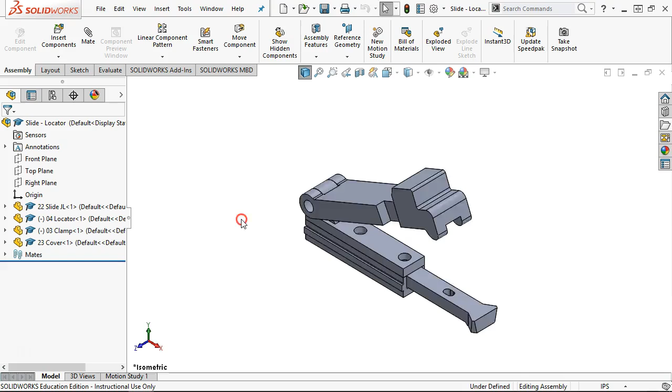All right, so let's take another look at this item. We made the on-the-fly slide locator subassembly, and when I dragged that in, I'm just going to right-click and open it. And when I dragged that into the subassembly, I noticed that it did not retain the slot mate. And all the rest of the mates seem to have come over, so coincident with all of those items did

not have any issues. So I don't know what the issue with that one is, but if that's the only one I lost, cool, I'll take it. Yeah, I'll count that as a win and go on. So we want to reapply the slot mate because it's still going to move within these dimensions. And I think we resolved the dimensions.

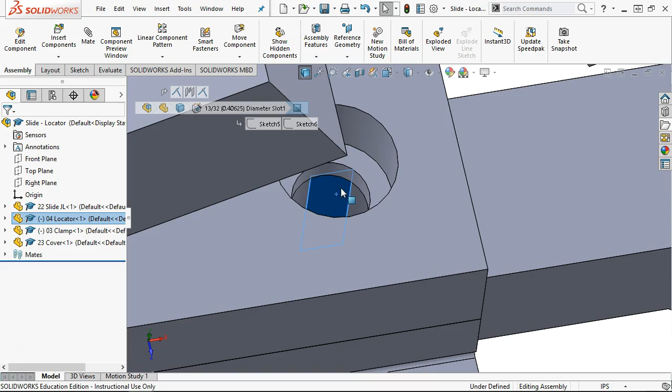It's another one of those. I sat and stared at it for a few minutes and got a slightly better view of what I suspect the rod is going to locate on. Basically, they're using the connecting rod without the lower half of the bearing in place. So that part of it sort of makes sense, that this is contacting the inside of the connecting rod without the lower half. So to apply this, I need some portion of the slot, some portion of the hole,

and we go into the mate. Is it going to jump right to it? Probably not. Tangency, maybe. Can't get to tangency. There's a gap tolerance there. There's not anything for it to pick up. So we're going to go over to mechanical. And then when I identify the slot, it's on the face, not the edge.

And when I'm picking for any mates, just as a general statement of managing mates: faces and planes. So face to face, plane to plane. Those are going to be my first choice. Maybe not always my most convenient, but my most stable. I'm always confident that I can get a plane to plane to work, or I can get a face to face to work. Then secondary is edges, and last is points.

So in previous videos where we've started the assembly, doing two cubes at a point, they orbit each other really nicely, but other than that single point of reference, it is very confusing. We looked at the constraints, and this is going to be another one where I'm going to have to open up the help file and say, okay, what does free do? Center in slot, distance along, or percentage along.

So I kind of suspect that if we're some kind of cam or some kind of movement, we could set the distance along or the percentage along to restrain the movement within that slot, because some other actuation is starting or stopping that movement. We're just using the clearance rather than going the full distance of the slot. So I'm always going to try free first, and if it cooperates, then I'm just going to stay with it. It moves from center to center, and that's pretty much all I needed to do.

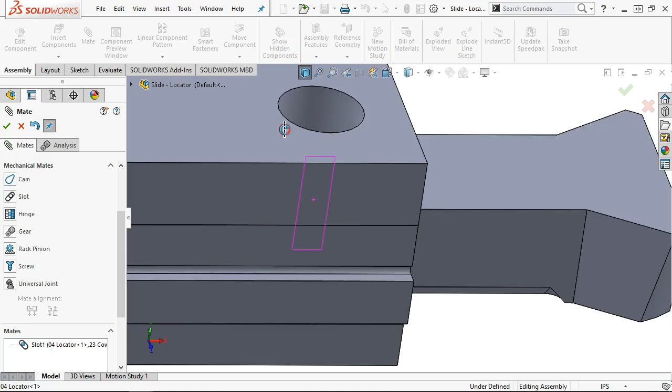There may be another 10 or 15 thousandths of tolerance there, and I say that, and then I'm not sure if that's the case or not. So let's go to, and so my line, no, it's going to contact. So it's not even going to center line, it's going to contact. All right, I'm good with that. That's representing the movement. That is what I kind of expected it to do. I can hit that wall, and I can hit that wall, and I'm done.

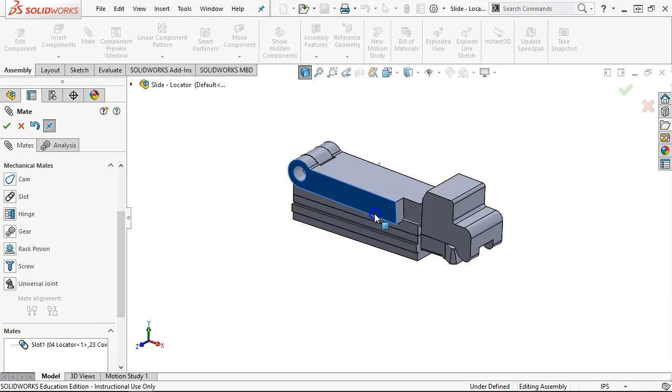And the spring that goes back here is the one that's providing the pressure, and then that rough locator is probably the next thing that we're going to bring in. Notice too that wherever I position that whole, two objects occupying the same space, it's on me. I have to make that determination. So this would be a good place for an angle mate. I know it can only come up so far, and I'm going to take my best guess and say 30 degrees. So while I'm in the mates, we've already applied, I hope.

Yeah, it looks like it. So a standard mate and an angle would say, set this at 30 degrees and you're done. 30 degrees, locked in, no movement. If we want this to be dynamic, we have to go to the advanced mates. And in the advanced mates there's a limit angle, and it's not specifically called a limit angle, it's just the advanced mates angle. And you get 3 selections.

All right, well, I didn't select anything, so my optional direction reference: plane, face, linear edge, or reference. Well, let's go with that one and that one. And it better not have separated from these, it's just the rotation. So the first angle is that it is at 30 degrees. That's its current location.

The second maximum value, 30 degrees. That's its current location. If I set that maximum value to 60, fine, no problem. It's going to stay at 30 degrees, but it can move up here, and then it can only come down to 30 degrees because that's my minimum value. My minimum value goes to 0, and as long as my current position is between the maximum and the minimum, I don't have any issues.

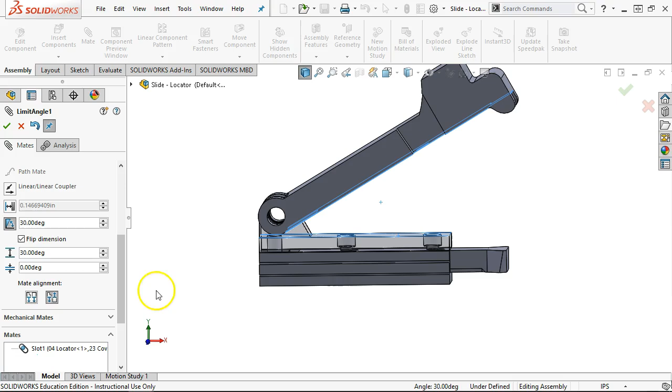So let's see what the result is of setting that. And I have my 2, so that one goes from 0, 30 degrees, 0, 30 degrees, open, close. Notice that I'm in the closed position.

We save that. Let's go ahead and rebuild and save. And I come back to my top level assembly. It updates, and I go to open, close. Well, it moves back and forth because I haven't figured out where all that stuff goes yet.

But I can't open and close the clamp just yet, or the cover and whatnot, because it's been set at a rigid, as a rigid subassembly. So we look down through here, and I look for rigid, and I look for movable, and it would be nice, but I don't see it.

So we come up to, sure, it's not going to be under component. Those are just view. Nope, don't want to do that. So for whatever reason, it's been in component properties forever, and it will probably continue to be in component properties forever. At the bottom right of component properties, we have solve as rigid, solve as flexible.

As soon as I say flexible, well, I'm going to get the funky dance because everything can move, but I get the ability to turn. And then I find my 30 degrees. I was a little optimistic, unless it's out here. And we're not going to make it out there, more likely.

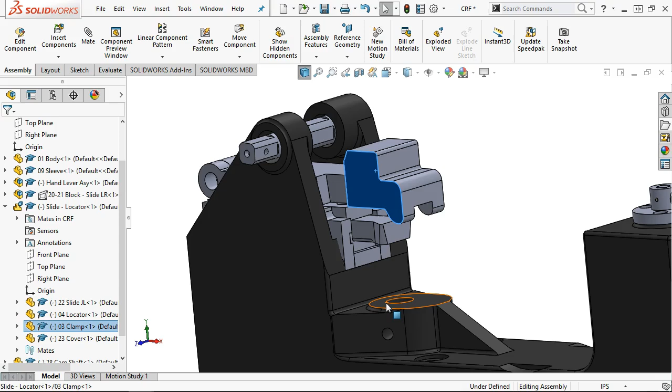Run that by me again, because solve flexible and rigid is going to mean something different to me. Okay, so at this point, I made this flexible so it moves in the top level assembly. Right, see, I would call that motion between rigid bodies. That's fine. Oh, so let's call that flexible.

And then rigid is just basically calling it I have one configuration, not even configurations, the last place that I left it in the subassembly, wherever that may be. That's where it's going to consider it being fixed. Right, so rigid. Okay, and now I go back to try and move it.

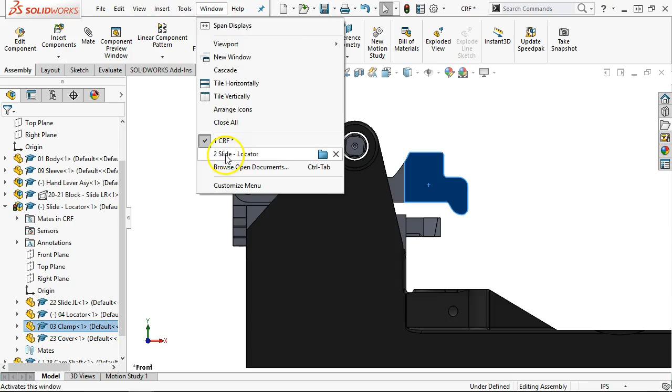Well, it can move side to side because that's the entire subassembly, since I haven't added a mate to tie it together. So to return to the subassembly, and then I open that up a little bit. I save it, rebuild, do all that, come back in. Yes, go ahead and rebuild.

Now it's in that position because that's where I left the subassembly. So it's rigid based on the last known location in the subassembly. I go to move this, it's not going to move.

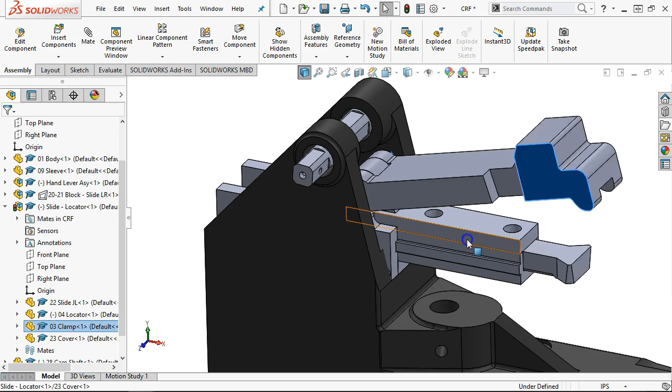And interferences? Yeah, I have interferences. If I want to look at those, this is as good a time as any to ask you to turn something on that shows or prevents that. The rigid flexible is one option, and then once I determine the max and min of this locator drive, or how much I can drop this face to get more clearance, then make a pilot assembly. That's one of the things we're first concerned about, interferences, among other things later.

0.25. All right, so I still have to resolve that one. I think I was being a little dyslexic on my numbers there, so we'll go back and pick those up and make that change.

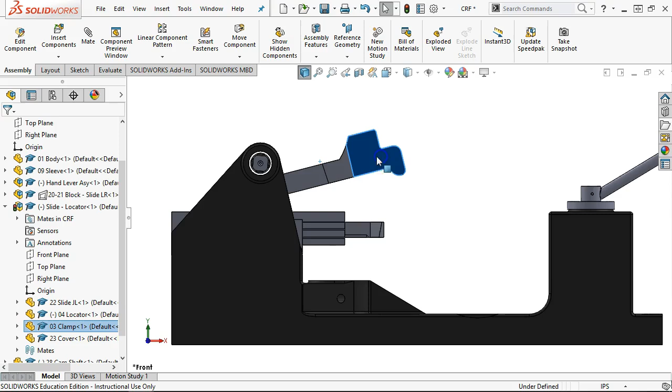Looking for the interference, if I go to Move Component, in Move Component you have collision detection. If I just go to All Components, it's already going to start in collision because we have this thing going on where I missed the dimension or have to check it. So these components, I want to see where this hits this. And when I resume drag, it's already in collision.

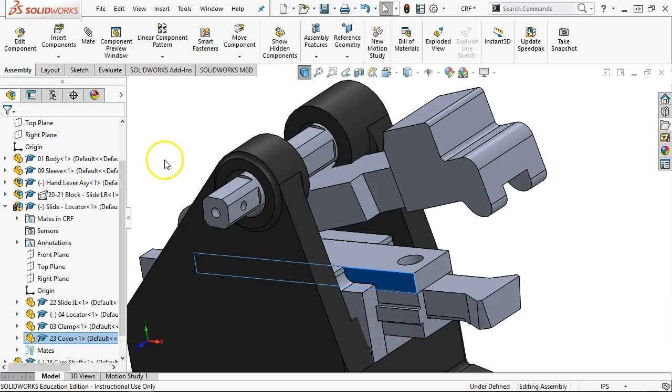So come back, it shows me where it hits, and it makes a little thunk, thunk, thunk. I don't know if you can hear that on the speaker. That's kind of handy to be able to see where that collision is occurring and make it resolve.

No, I did miss it. It was 22510, 22515. So I missed the 2, that's where it came out at. And save.

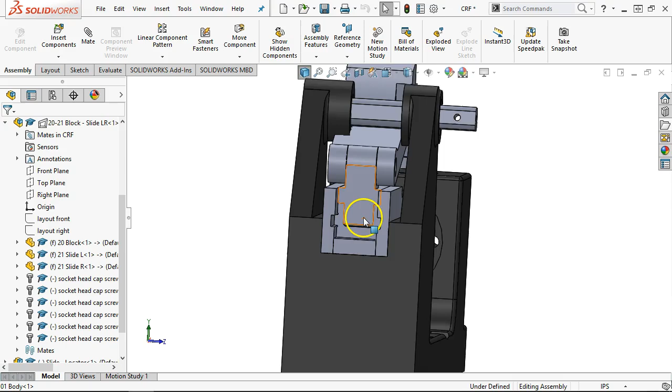All right, so again you see an obvious error. I got to go back and check that, find out what's going on. And now that looks a little tall because I was thinking this really needs to be flush. So somewhere else in the layout of this item, I have to go check that dimension, or I picked the wrong thing out of the sketch.

All right, so you get into these levels of complexity. I'm not going to chase every dimension to the nth detail. I've got to move this along and figure it out as we get into the assemblies.

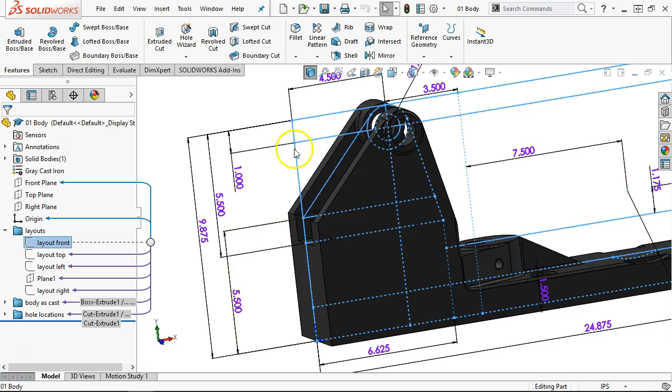All right, so we'll take one more quick look at this before we get into it. There were the layouts, there was the front layout, and this went 5.5 from the top, and that 5.5 is in the wrong position. It looks like it's going to the very top edge when it should have been the center, but that's really only good for 1 inch, though that might be the difference.

All right, let's go back into the front layout. I'll pick up that sketch. I'm trying to get a little better at dragging these dimensions, so if I reposition to the center, wow, there's the 4.5, so it was good for 1 inch.

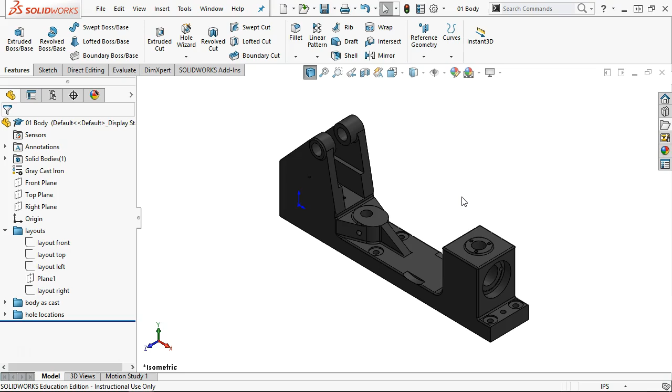It updates, that's a little closer to that face. A little weirder on the fillets, so my weird fillets just got a little weirder. But now at least I've identified another potential error, and I've taken a potential error and validated it, and said okay, this is what I need to update to.

So that looks better, that comes up flush. All of a sudden my 30 degrees is not so much of an issue. I still don't know whether this is in backwards or forwards, we'll get that figured out eventually, hopefully. As far as clearances or what it would be doing back here, it doesn't look like anything's going to be in contact. Even if this could come all the way up, it's not going to rotate around.

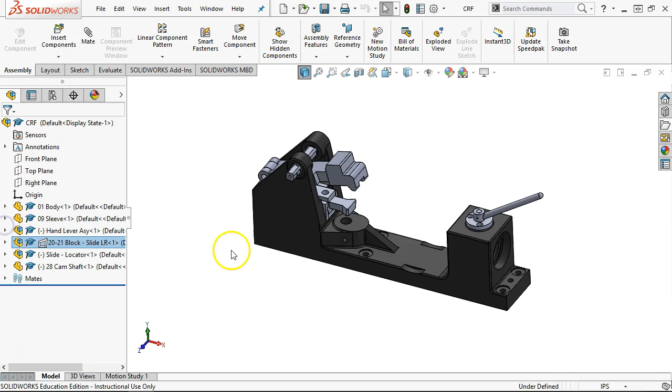All right, and then we'll rebuild and go ahead and save. So a couple things crossed off the list. Let's go ahead, we're still working on this side, so I haven't created the bushings, and there's going to be a bunch of little hardware. I do want to get into the drawings tonight a little bit, so we can carry those over.

And so let's bring in the locator and the major components, and then we'll take one more pass after, probably Thursday night, sorry, after spring break, Tuesday after spring break, and get into the drawings and start talking about manufacturing processes and design for manufacturing.

So, insert component existing, or thereabouts. We had that rough locator, and it goes into position. I would really, that one's not going to be the best example, but we'll go ahead with it. So that goes into position, and it is going to be concentric, so it threw it out there in space somewhere, not too far for once.

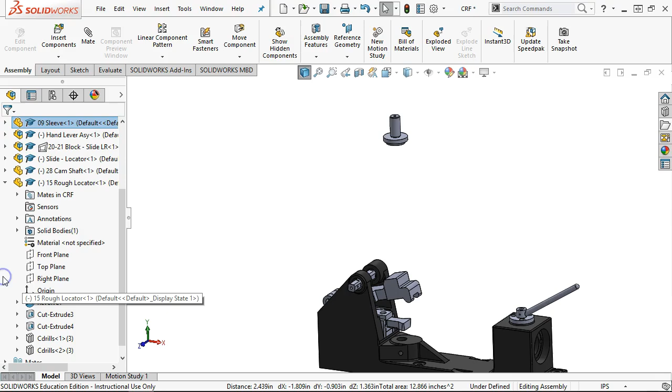I did not catch the orientation, so this is one I'd like to reverse, but I don't want to go too deep into it. I right-click, expand out, right-click on it, and flip the alignment. Of course, then it throws it to the other side of the part, which is always fun. Why couldn't it just leave it there? But it's in the correct orientation now, so we're good on that end.

This is going to be in contact - edge, no, face, yes, coincident. And then we have to figure out rotation. As I come around, I should see that little fingernail, but the fingernail doesn't help me a lot.

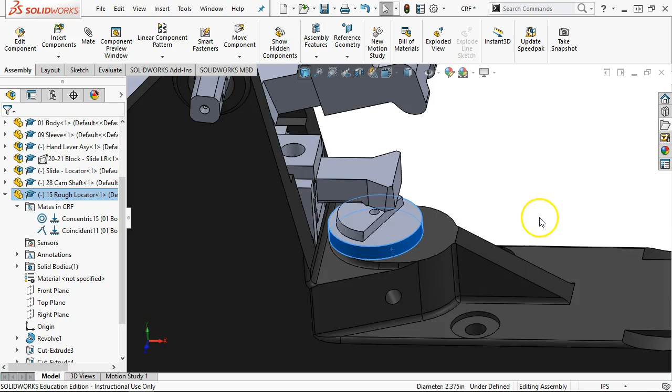We're still waiting until I have the connecting rod in here to see, height-wise, the rough locator, how that's going to actually turn - kind of what the intent is. I know it's going to be somewhere along that line, and then we have one of the plungers or something in there holding it in place.

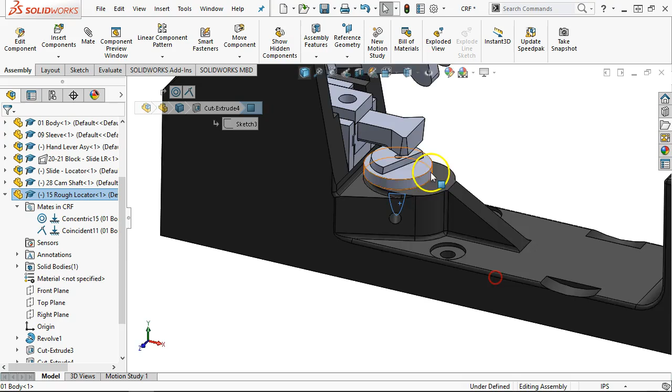So the question is, do I leave it so it can rotate and come back to it, or do I try to put it in position? I don't really have anything on that face I can use. So really I'll probably end up back over here, and just for convenience to the front plane, we'll go ahead and set it at an angle.

60 degrees - let's see if that keeps it pretty close to the fingernail. Maybe off a little bit, depends on how far we rotate. But again, I pick those mates on convenience, not necessarily that I have a complete mechanical understanding of the function of this part.

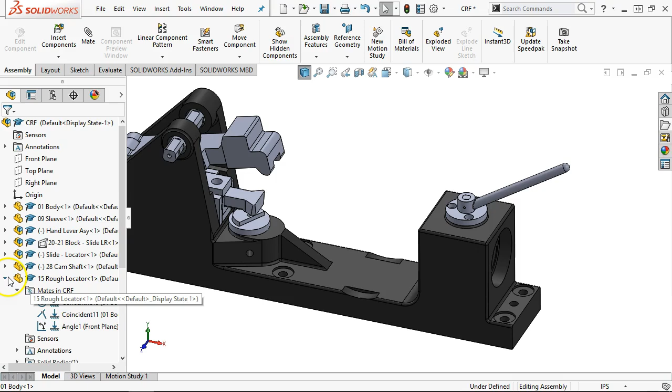All right, so we've got that. Last time, at the very end - I don't think that made it to the video - we went out to McMaster.com and grabbed a couple of bearings. So, insert components, and we drag down - there's my 5972K510 McMaster part number ball bearing. We got a sealed bearing, and as usual it comes in with a couple of sketches shown, so we just hide those sketches and that sketch, and we're in good shape.

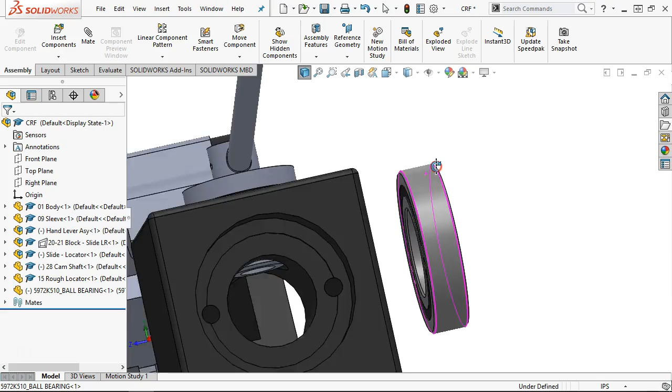It doesn't have much, I guess it has a little bit of the raised area, but really this relief on the interior is so the floating part of the bearing isn't contacting the surface. I want contact to contact to be coincident, and I'm showing the workflow that puts you into the fastest assembly process. Going into coincident, then control-select the cylinders, so cylinder to cylinder goes concentric.

So this would be one of my hardware pieces that I need, but I don't necessarily want it in this order. So one of the things when we create the bill of materials is the fasteners, the pins, the individual items - those may end up in a folder at the bottom because they're not in any specific order, in a folder that says, this is all of my hardware items.

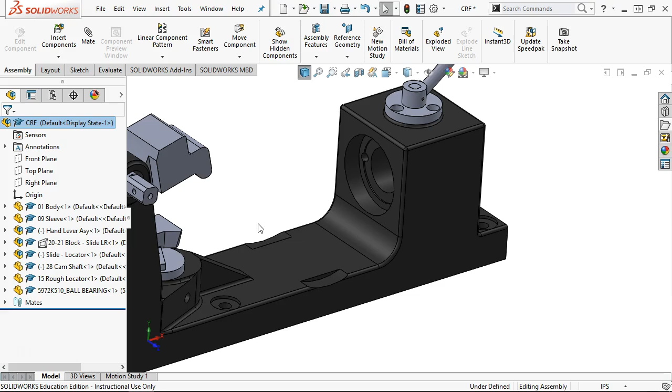Let's see, when we did the assemblies, I don't think I've gotten to this one yet - we went through the 5 ways, 6 ways. Okay, now 6 ways. If I hold down the control button, I can bring in another instance by selecting from the feature tree or from the model. So if I control-select this and just drag it, it would create a second instance of that part - so it's not a new part, it's an additional instance.

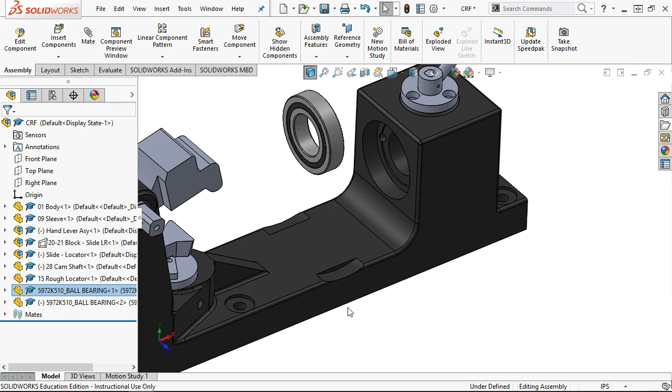And so instance 1 and instance 2 are the little brackets. Everything else is instance 1. We are incrementing those values, so if I deleted instance 2 and I brought in instance 3, it's not going to go back to instance 2. All right, and those numbers are pretty much irrelevant other than I'm kind of keeping track of how many instances over the life of this assembly I've managed to generate.

All right, so face and control select the face, coincident, concentric, and we'll lock the rotation. I want to say inside of when we're doing the paperclip, those pop-ups are going to be quite a bit faster than going into the mate list and picking those. But I believe when we assign concentric, it comes up with an additional lock rotation, and you can do it right from the mate. But expanding it out, identifying the concentric and saying lock rotation, not a bad thing.

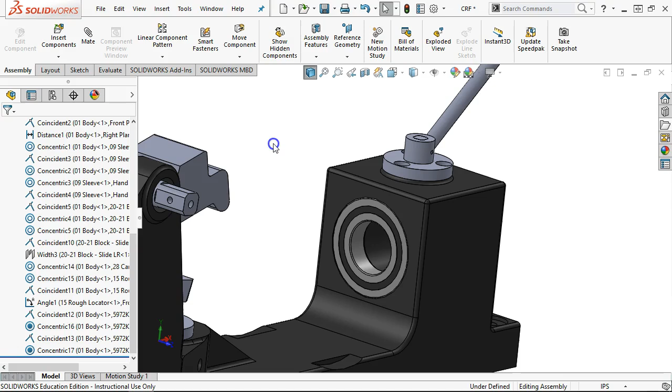The other thing is within the mates, what I've done for fasteners is there's usually kind of an apparent break here where I know I've started to add fasteners, socket cap screws, hex bolts, things along that line. They're pretty apparent that I don't care about the rotation, so being able to go through and identify all of the concentrics, and this is a bad example of selection, but I can right-click on all of that group and say lock the rotation for all of my fasteners, for all of my bushings, or all of my whatevers. All right, so other than that, I don't go into the mates too much anymore.

All right, so we got that far. We're ready for the cradle. And we said that the cradle would be a good candidate to generate a subassembly, not come into the top-level assembly and say after the fact, hey, it'd be great if this was a subassembly, let's create one on the fly. So let's build a subassembly for the cradle. And I still have not created an assembly template that is residing in my folder, so I'm just jumping back to the standard templates or tutorials and dealing with that one. The open documents are the top-level assembly, so not a good selection. We will browse over to find the cradle.

And then, let's see, we never did find in the database where we could put the threads on, and so we'll probably come back to this one after spring break and start with the swept cuts, and I'll see if I can find out the information on the thread tool.

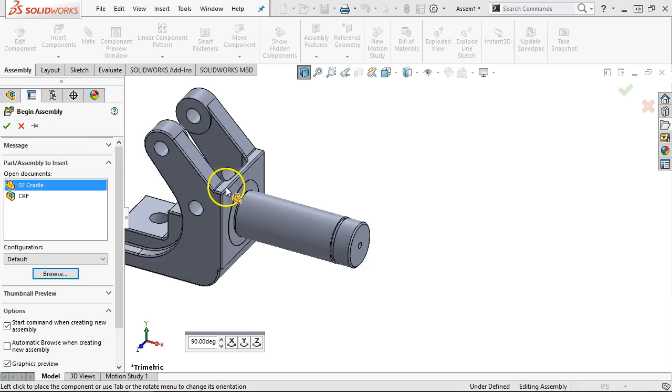So again, going to the OK puts origin of the part to the origin of this assembly, and it fixes it. Well, all of the rotation is going to take place in the upper level assembly. Don't care about it here. So we're just going to go ahead with leaving that fixed in position, and the rest of the items tie into it.

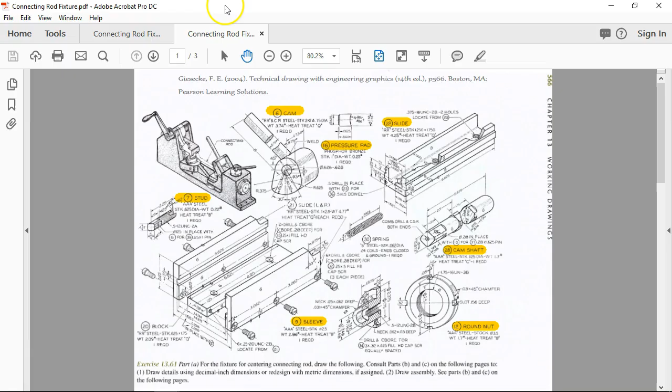All right, so the other item 6, cam. And let's fly this in for a second. We'll take a look at some of the build. So the cam goes in, and then the connecting rod top. And we can't really see what's going on there, but there are the 2 lock rings, retaining rings. And so item 6 that we had some fun with is going to be in that group. So I'll go ahead and bring that one in. There should be an additional shaft.

Oh, before I fly that one out, let's go to the earlier and see if we can decipher. So there's the cam. And then it comes back, we have the spring, there's that other little block with the angle, so we're good with that. I can't really tell which one that is. A little bit cleaner on the side. Alright, but no specific call out other than, hey, go find that part that kind of looks like that. And so that's the other rough locator. Alright, so something else to look for. We'll find it eventually. Alright, so the spring, and then the item 6, and the other one.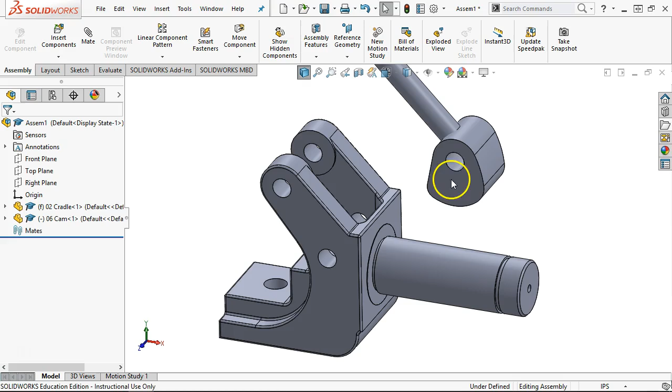So component. And a lot of this, what you're seeing is habit of going to insert, insert component. And so we bring in the cam. And we already have it in position, so that one can go concentric. And we know we have that kind of tight fit, or maybe interference fit at this stage. So I probably wouldn't go coincident because I'm going to have that gap. I could show it as coincident, but probably not my preference.

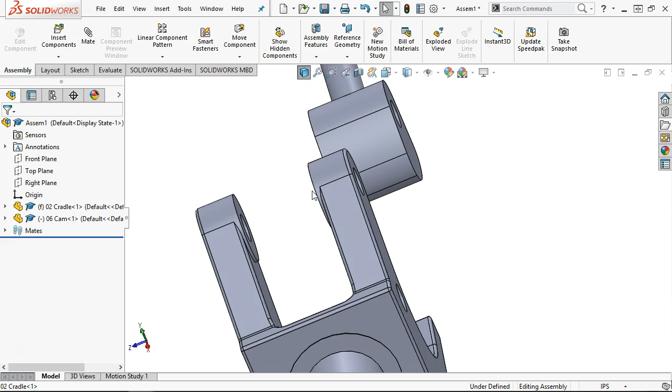I would rather stay with the width so that when we're looking at the gap tolerances or trying to measure gap tolerances, because we stayed at maximum material condition, I'm already in the tolerance analysis. I'm already at minimal gap tolerances, and then I can relatively easily go back and calculate maximum gaps.

Alright, so mate reference, we will go from standard mates to advanced, pick up the width. I could put this on the front plane, so since we drew these as mid-plane extrusions, I could go to the front plane. I kind of want to bring out the width a couple more times, so between that face, and then it self-centers. And if we go to the top view, then I can see there's a little bit of gap.

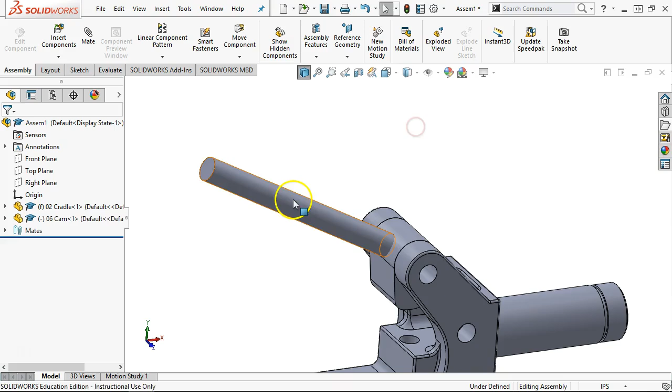So what happens is if I come back to simulate this item and put some loads on it, depending on the selections that I make for my simulation, those gap tolerances and the shaft and everything else, that stack up, comes down to some very specific settings in the simulation that we're defining.

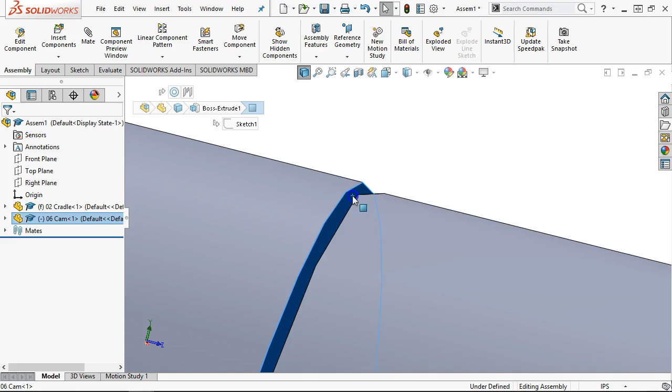Question? What's the width of the cam? This was one of those weird 1.734 that worked out to 1.764 or whatever. So yeah, that's a strange one. So it ends up that there's only, back to that half thousandths thing, a couple of thousandths clearance. Okay, 10 thousandths of clearance. But in my assembly, since I haven't set any dimensions, that could be 5 thousandths or it could be 12 thousandths. I don't have 3 decimal places established.

All right, one of the last parts that we did. Let's go ahead and save this. And we're just going to call that the cradle subassembly, since it doesn't have a number or anything associated with it. And we'll browse. I can't remember what that thing was called, so we'll have to find it. And there's the other shaft, the other cam. Nope, that one's buried. The rest button. Hey, that's probably it. That's what goes in there. Found it. And then our 2 round nuts, the clamp. That's what I'm looking for.

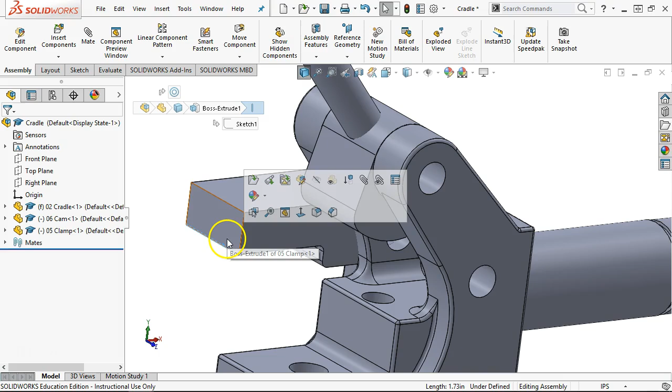Alright, so we'll go concentric. And then for comparison, we expect that to be 1.734. For comparison, let's do this one as a front plane. So I extruded this mid plane, and I should be able to go to the front plane of the assembly. I hesitate to go to the front plane of the cradle because I would like to have some error checking in that if the cradle was to move off of center, that it would, wow, there's an interference there all of a sudden. What happened? And we can trace back through our strategy and follow that decision process.

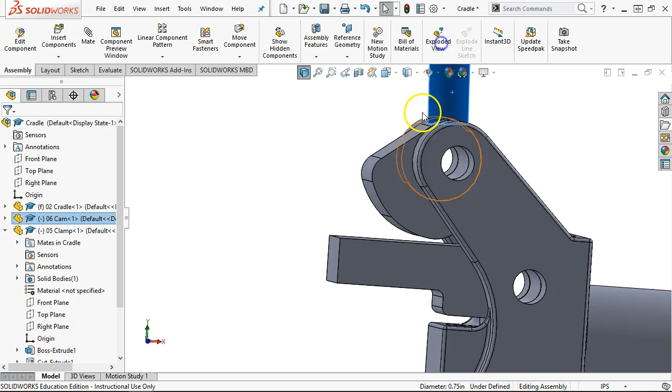So that can go to coincident. Maybe front plane of the part, front plane of the assembly, and that will also center it. But I have to make some of those decisions and otherwise know that they exist. Alright, so another advanced mate. And since this is not a complete surface, I'm going to be limited in what I can do for the cam, but we will see how far it goes. I should only need that surface.

So, cam follower. Alright, so I'm not just going to jump into the cam follower and throw that one at you. We will go into the mates, and under the mechanical mates, we are going to be able to pick up the cam, and we'll take a look at a little bit more in the selections. Alright, the cam path, and then the follower. So it's pointing at the follower. And so in purple, the face, and then the cam path, yeah, that's the arc. So it's pretty much what I wanted. I thought there was some more that made me think of something else.

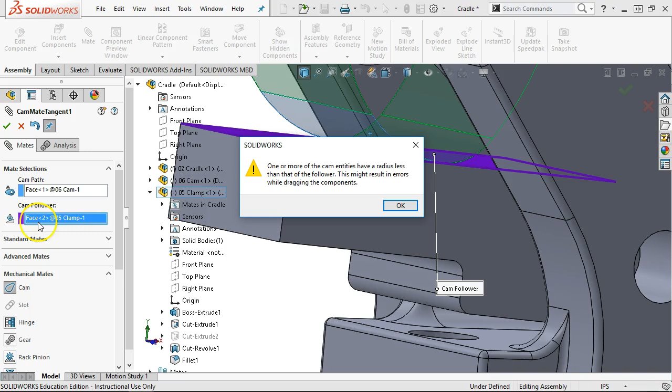So let's go ahead and have a radius less than that of the follower. Oh, it's not going to accept the flat. It wants that little bit of arc. This might have an issue, so let's see if it has an issue. Well, it follows it, and then it kind of reverses and does some weird things. So maybe I need a limit angle that I'm only going to throw this 30 degrees. I could do that, and then I'm not going to run into the weird interferences, but I have most of it there. I get the general sense of what it's supposed to be doing, so not that big of a deal.

What's the other shaft that goes in there? Or was that just a pin? I think those were just pins. Let's see if I can find that one real quick.

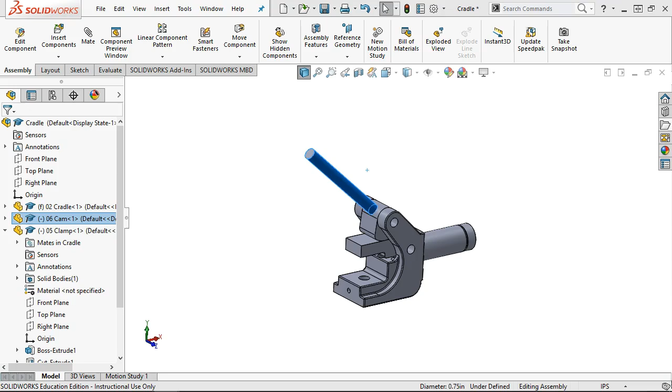Yeah, 625 by 3.5 inch pin. Alright, we'll worry about those later when we get to the bushing bearing side. Alright, so cam, the clamp, insert components. We'll browse back over to the, whatever I said that thing was, the rest button. And maybe the rest button, let me go ahead and kick that one out and make sure to save this, rebuild and save.

And I don't want to let this go too long before we do the mate references. So I'm going to pick an edge, and then the rest button is kind of a candidate of maybe we use this more than just in this assembly. And so if I add a mate reference and I'm going to put this in multiple locations within my assembly, having the mate reference is an advantage because we're going to pick that edge, and then I'll go ahead and save it, and it adds a reference, default reference.

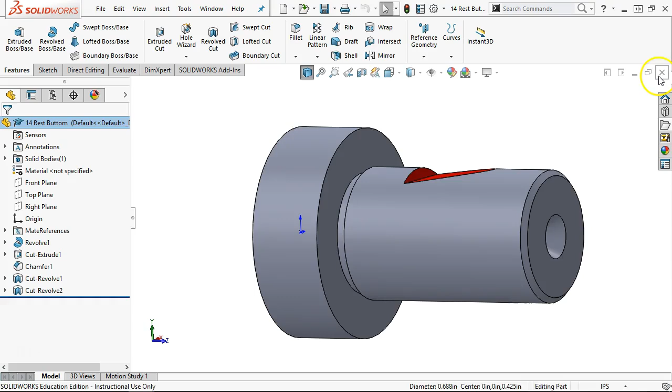And there's some rules of naming if you want to have more than one mate reference, and then it gets confusing, and about that time I just kind of go, okay, I can use one mate reference, cool, next. And so I never quite make it to the second and third mate references. I'm going to get a lot of value out of just this one, so I don't worry about the others. So if anybody figures it out, let me know.

Alright, so rest button comes in, and now, instead of floating around in space, it says, oh, you have a cylinder. That cylinder is automatically going to get a concentric. Those faces are automatically going to get a coincident. And so I click, and I'm done. Alright, so that one little mate reference saved me a couple steps.

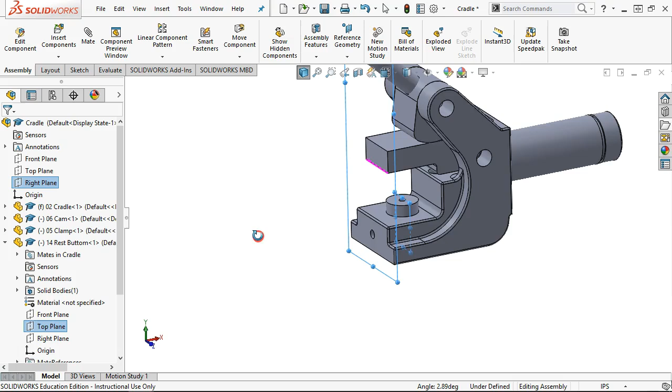Alright, so let's see if the length came out okay. And so this one, as far as the rotation, oh yeah, we were going to determine if that could have the angle so that we could improve the manufacturing process rather than having that back angle and custom grinded tool. Okay. So that being the case, let's see where that lands. Front plane, top plane works. And then the right plane of the assembly, I'm good with that. I'll just jump into the mate, apply a parallel.

All right, it used to be that the default was coincident, but the problem with coincident is there's a 1.5 inch gap there. So coincident hardly ever worked unless they were already aligned. And so 2014, 2015, somewhere in there, they said, okay, if you have two planes that aren't already coincident, it's going to default back to parallel and not bark at you every time you do that. So that was kind of nice. All right, so hopefully that's the rest button and where it belongs.

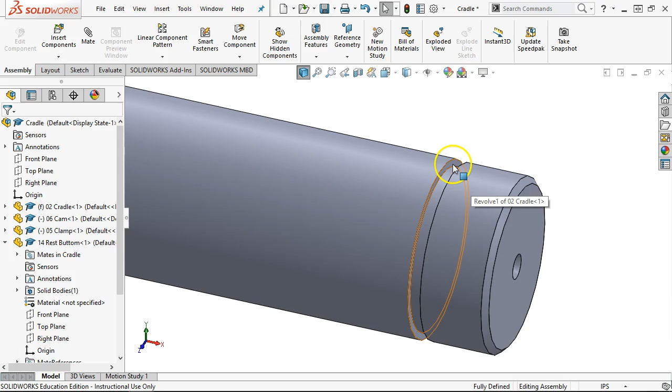So then the question on the lock rings, when we put those in position, I don't want to create an interference by going right to that edge and saying that's my edge. So we're going to do one more save and come back to the upper level assembly. And really they're going to be sitting between face to face. So at least in the semi-perfect world of my model, that's going to give me a normal distance of 4.25. If it works out that in the cradle, that distance ends up being 4.25, 4.17, or that distance ends up being 4.25, 4.3. All right, I'm going to be setting a distance mate for that item.

All right, so let's go ahead and bring in the rings. And we have the round nut, and then we have the one that has the bearing face on it. So I'm assuming that is to the interior. So without the mate reference, we're going to go concentric. And I don't like its position, so we're going to expand out. While it's here, flip the mate alignment, and sure, I'll lock the rotation because I don't really care. And we're going to come back to that face, and I'm going to give it a distance, 4.25.

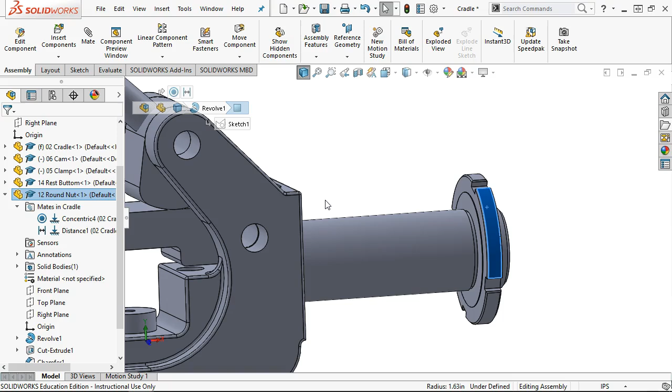All right. So when I bring this into the upper level assembly, I'm kind of looking at it as, again, when I put this on the face, that there really shouldn't be a gap here. And we haven't established preload for the bearings or done anything crazy that way. So it's just basically, I'm not at an interference, and I have a measured distance that I'm working from.

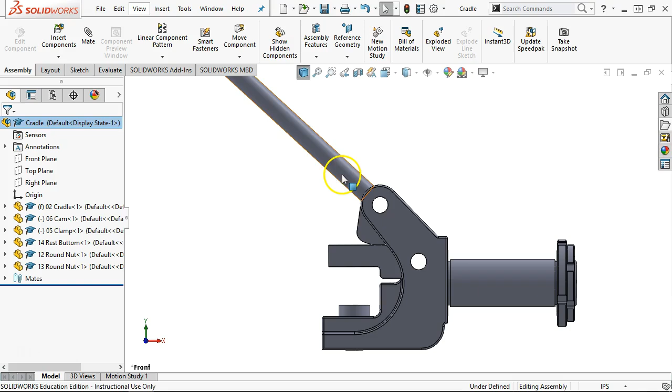And then we'll go to the next item, item 12. Or item 13, and we go concentric, and shouldn't really matter, chamfers on both sides, pretty much symmetrical, coincident, and then probably aren't ever going to line up with anything anyway, so wherever I lock the rotation, concentric, and lock rotation, I'm going to be okay with that, and save it. Alright, so except for hardware, the plunger, push the pin, spring, pins, we have pretty much what we need. Maybe not the angle just yet.

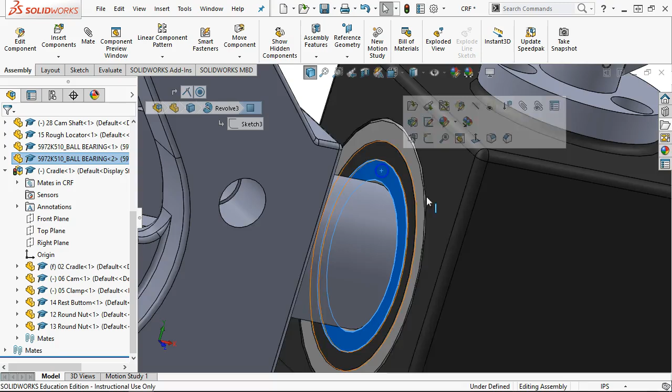Alright, so back to the top level assembly, have the selection, and we're going to insert, and we go to the cradle, and we drop the cradle in place. Sort of. Alright, we get it close, and then it really doesn't matter. I could go to the bearings, I could go to the center, and go concentric, and then we have that bearing face to the cradle face, and then what does my rotation look like?

Alright, we know it can move. How much can it move? Alright, at that point, we could have put a little bit more so it could do that, but then that kind of defeats the purpose of having that over there. So I would like to know what that angle is. And that still doesn't tell me what this is doing as far as the relief, but we have enough to go on.

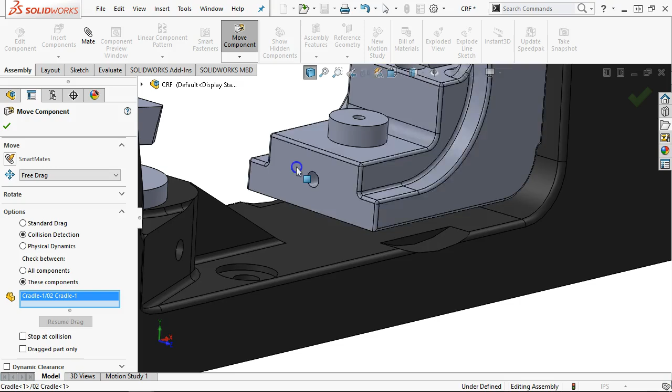Alright, so I'm going to try the move component, collision detection, these components from this face to this face. Go ahead and stop at the collision. Oops, I didn't want to do that. Let's try that one more time. Move, collision detection, these components. Oh, they were still selected. And stop at collision, resume drag, and I contact it. Highlights in blue, it's in contact.

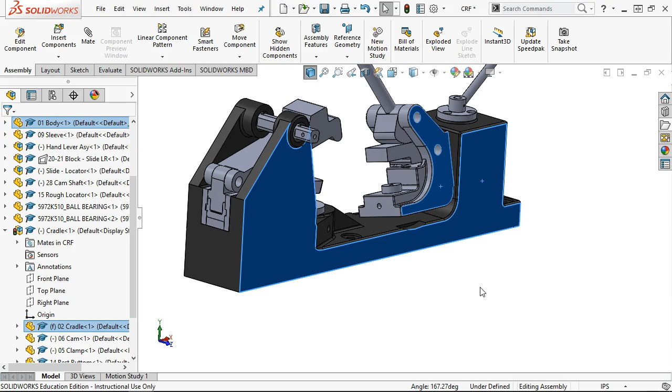So I can go to the planes, or I can just go to the face and say 167 degrees. 90 minus 167 degrees is about 23 degrees. Do I want to go try the plus minus? Sure. We're going to set a limit angle on this of about 23, 22 and a half degrees would be nominal. I'm okay with the 23 degrees. Make sure this saves. And so the front plane of the cradle to the front plane of the assembly.

And we're going to go into the mate. We're going to set this as an advanced mate and a limit angle. So 23 would be, that's its current position. Actually, you need the current position at 0. Plus 23 degrees and minus 23 degrees. All right, so it didn't like the maximum value being a minus sign. So maybe that was the previous issue. We'll go ahead and accept.

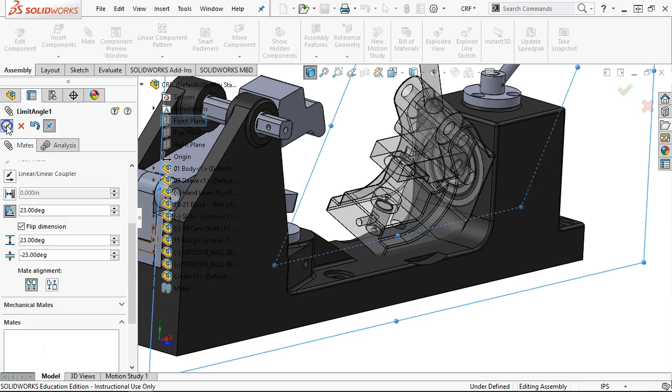And that one didn't quite end up being 23 degrees, did it? So 167, 90 minus 60. Oh, 167. All right, so 180 minus 167. That comes out to 13 degrees. So don't trust me when I do math in my head. Get out your cell phones like everybody. No.

All right, but an easy fix, we go back in, we identify the items, delete, and OK. All right, so contact, that's the range of motion. We have enough relief back there that it looks like it might be contacting on the radius just a little bit before. Oh, whatever. I'm not overly concerned with the radius. All right, but we have a really good start. We made some corrections, and let's take a quick look at the drawings then.

All right, so I'm not far enough along to create an exploded view, so I'm not concerned with the assembly drawing so much. Let's bring in one item. We'll go for the body. And we'll look at some of the things that we can do with this body part, or 01 body.

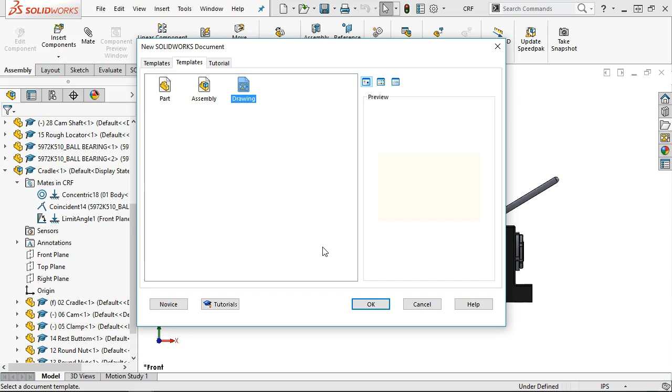All right. So when I go into the new, I haven't created a drawing template as of yet either. And going back and reviewing what I've done previously with the drawings, when we make the drawing template, I will probably revert back to take your favorite existing ANSI or ISO sheet format and modify it. What I got into trouble with was because I wanted to create my own from scratch, brand new. And whenever that happens, we all know that is not going to end well.

All right, so at least for this one, I don't want to get into the templates. I don't want to get into the annotations. We're just looking at the body, and I can always come back later and update my sheet format. So one of these days, I need to do the conversion and say that we are 11 inches, okay, and 8.5 inches. That doesn't sound like 279 though? So anyway, we have the size. I'm going to browse, and we're going to just bring in the body.

All right, so by default, the model view is where we start with a standard drawing view. And then we have to decide, are there any configurations? Well, I have that as cast configuration. Well, for the default, my first look at it, we'll go with the default. And yes, I want to create multiple views. Probably not enough room based on the length to shove an isometric in here. So maybe we do that one separately. There's probably not enough room to put 3 views either, but we'll see what happens.

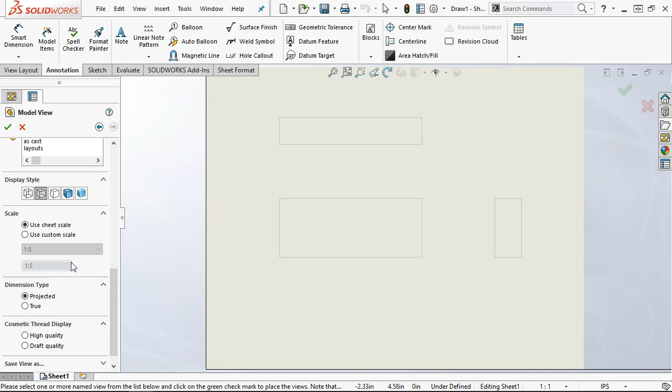All right, but probably for this one, let's see what it looks like, hidden lines visible. Sheet scale, it does an automatic calculation. It says it looks like about 1 to 5. Since it's probably pulling from an ISO reference, we would be 1 to 1, 1 to 2, 1 to 5, 1 to 10, as opposed to quarter scales or eighth scales.

All right, and then projected, true, high quality, and draft are all okay. We hit OK, and it goes out and it says, I am now referencing your part. Here's what you see. And there's all your information. All right, if I do not have 01 body, then all of these turn to nice little amber boxes with X's through them that say, can't find the part, you don't get the view. All right, so they have to travel together.

As far as moving things around, the front view is the parent view, or the primary view. So the alignment says that the top view will be able to move up and down. The right view will be able to move left and right. But everything moves in reference to the front. All right, I can break that alignment. Probably don't want to do it right now. And if I added an additional view, then I could also go back in and add alignment.

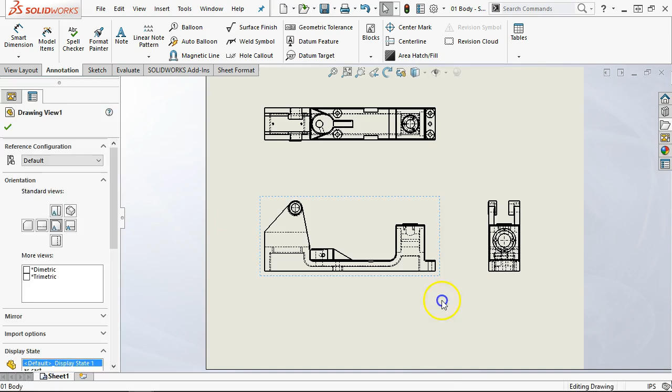All right, so that gives me a good place to start. We have not created any layers. We have not created any additional options. We're all at the defaults. So this just gives me a starting point to discuss the views and putting in dimensions, creating additional views.

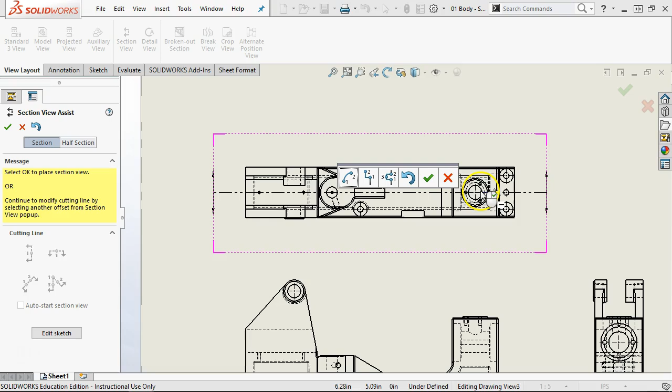All right, so the additional view that I might like to see, everybody likes section views and detail views. So under View Layout, if I create a section view and I want to see right down the middle, well, it gives me the nice little pattern, but I really want it to be the other way. And I would like for it to be attached to something that's probably not going to move. And no, we're not doing an arc offset or a jog single offset or some weird, go through 3 different levels offset. So I'm just going to go ahead and accept and pull off the section view.

All right, and up in the options are the standard fonts for the section view, and that large section, small AA kind of drives me crazy, but we'll worry about that one later. All right. So downside is that that's not really the direction of the section view if I'm folding this up like a standard view. It's visible, but it's a little strange. All right, so it gets alignment as well. And so that might be something that I would want to put on a separate page.

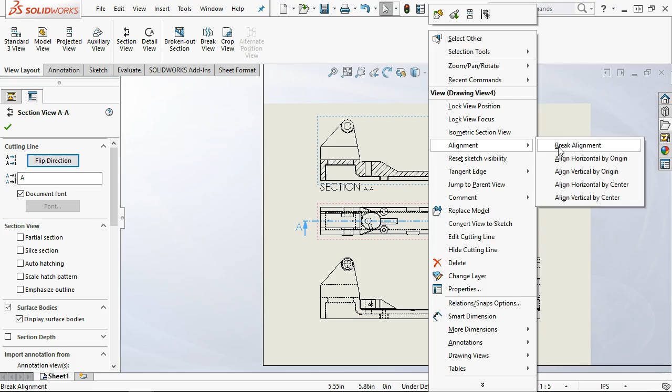And so I think I can, let's just break the alignment. So right-clicking on the view, going to its alignment, I can break the alignment, and then this can move freely and do whatever I want it to do. I can also hit Control-X, yes, delete, and come down and add a sheet, and on the second sheet, paste it in. All right, so section AA, reference page 2, whatever.

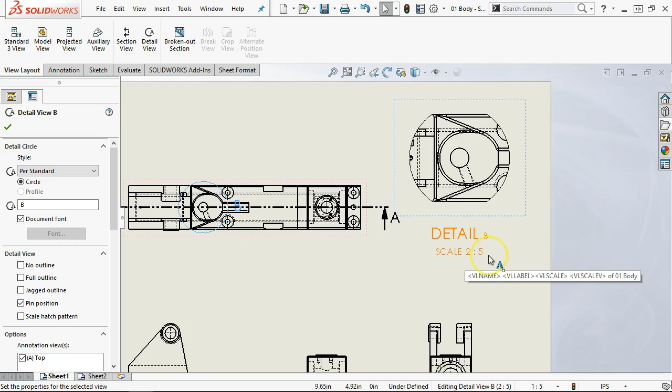All right. Before we get into the dimensions and getting into some of the detailing, let's add one more sheet, and we'll do this again from the view palette. And on the view palette, a lot of companies are moving more towards the view palette rather than the model view. I go back and forth, and whichever one's active, I'm good with. I don't care one way or the other.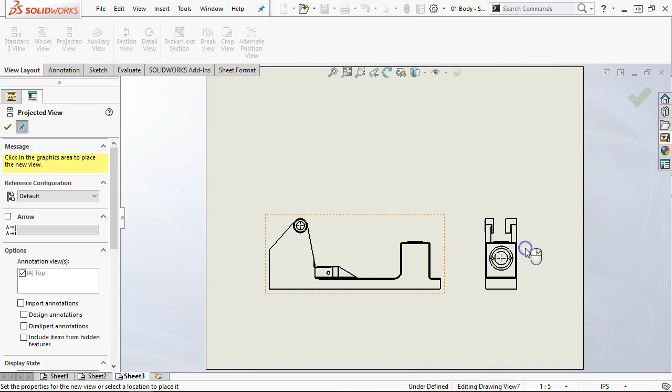And this is going to go with the front, auto-start projected view is nice. So instead of telling it I want 3 views, I'm going to bring in the front view. We'll drag a view off and select. And isometric is isometric. All right, so the thing that comes up every once in a while is what we're looking at.

What happens when you have something that is a first angle projection? Really, the way I describe it is how you are manipulating the part. So when we pick up a part in third angle projection, I hold it in my hand and rotate the part clockwise. I'm now looking at the left side. This is my left side view.

However, if I go to first angle, it's actually looking at it this way, which means I'm going clockwise. I set the part on the table and go clockwise around the part. So when I go this way, my right side view is actually looking at it this way. Confused yet? That's why none of us can manage first angle projection.

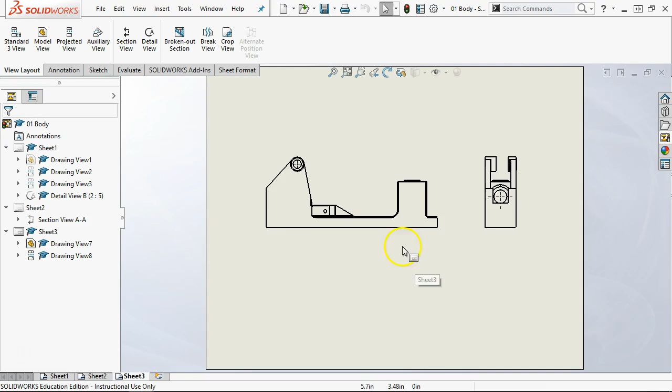So when you get first angle projection, the thing of note is that very quickly the isometric is in the lower left. Wrong or right isn't an issue to discuss. Left view, front view, and top view all go accordingly.

So if I want to add a view, let's go with the projected view, and I drag this down. Notice that's the view I got, and the bottom view is in relation to the part.

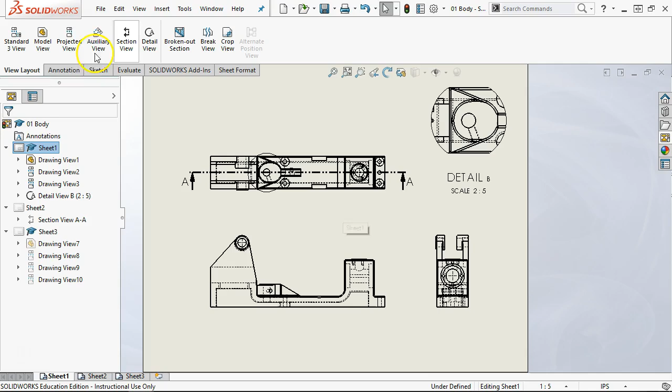Annotations. So, smart dimensions. If I go just like we did in the sketch, I'm going to be able to pick edge to edge, or I'd be able to pick an entire object, so an edge, and get the same thing.

Let's see if we go to center lines. In my settings, in my options, which is a whole other conversation, I have center marks set to come in automatically, so that's why I got a center mark. Did not get the center marks on all of them, but I got quite a few of them.

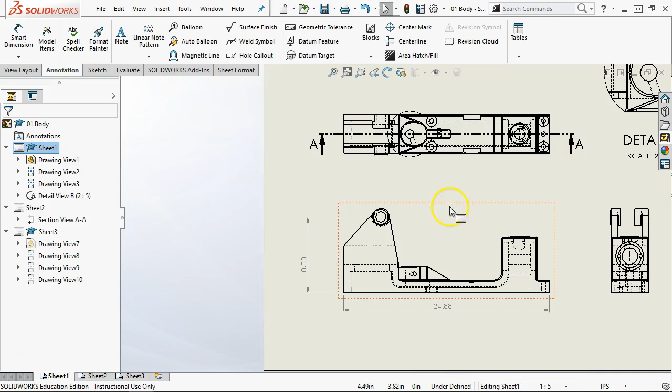So overall, we can start to apply those dimensions. Usually we want to put some colors to those, maybe change the font, but for starters we're going to just apply a few dimensions and get this going. So things like center lines.

One of the dimensions they had was from this bore to this vertical bore. So I needed a center line that I can pick from there to there. It shows up in the basic format, but it's an actual center line, and I can now dimension to it. Center line to center mark, and when picking the center marks, I'm going to make sure I'm on a vertical or horizontal, because that's going to help drive the dimension. So 3.5 inches, and we have those locations.

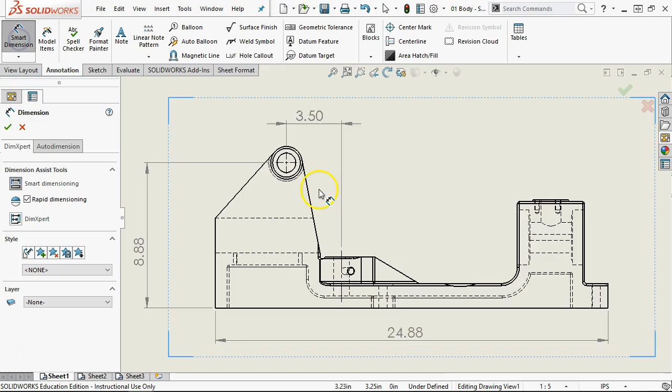Diametral and radial. So when we pick, just like the smart dimensions out of the sketch, notice I'm in 2 decimal places, and continuing that my default was an ISO-based template. I'm now looking at ISO or ANSI dimensions. I got ISO on them, right?

My ANSI dimensions would have the little leader and jog line and everything else. And the 8.88, instead of being vertical, would be horizontal between the extension lines, not on top of the extension line. I think I've mentioned before that in 2010 or 2011, I loaded up SolidWorks. I didn't think to switch it over to ANSI. I started using ISO, and I found some very distinct advantages to having these dimensions be vertical on top of the extension line.

So love it or hate it, I started using it, and since I found those advantages, I kept using it. I don't care which one you use when you're going through for track 1 for the chapter 4 assignment. Whichever one you pick, whichever you prefer, knock yourselves out.

So our circle is automatically going to go to a diameter, and a radius or an arc is automatically going to go to a radius. Just like in the sketches, we're going to be able to switch those from the leaders to a radius, back to a diameter, to a linear, and then there's also a one arrow solid leader that goes through the center.

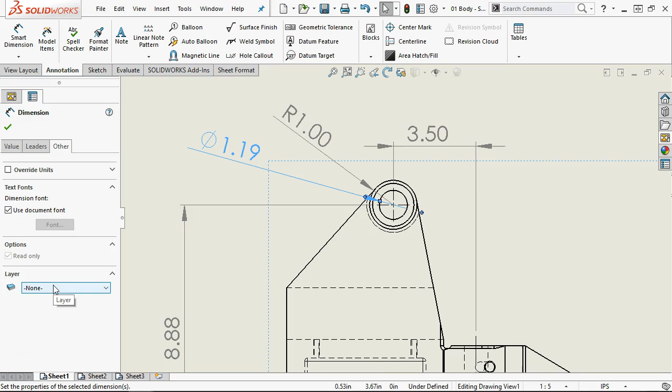Documents, and then we come over to the layer. When we get further into the drawings, we'll set the layers because I would like to have a little contrast, make this look nice. My center lines could be in, I usually pick magenta because they jump out at you, and it annoys everybody. Dimensions are in blue, nice calming blue.

Then what else? That's about the extent of my layers. I maybe generate 4 layers, and what else do I need? So we'll go through some of the details then.

All right, so a few dimensions. All of the rest of this we will get to. Notes are our annotations. The note patterns, balloons, usually with the assembly or exploded views, magnetic lines are all related to the views. Surface finishes, I think we have a few of those.

I pretty much decided that we're not going to go through and put grind marks and surface finishes on every single thing that they ground here. I don't know that we could complete that this semester. It would be close, but on the other side it's not supposed to be any more miserable than I've already made it for you.

But we will take one of these and go through that as cast. This is what I need to build the part, this is what I need to manufacture the part. And then in the normal manufacturing process, these are the stock that you're going to leave so that I can come back and perform those finishing operations of grinding or EDMing or whatever it is that we're going to do.

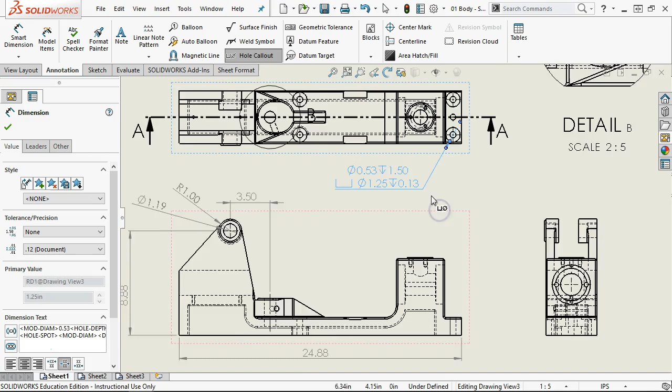But it should be counting that there are 4 of those. Usually I would get 4, and we would see the spot face, the through hole, 0.05 or 0.53, 1.5 inches through. Well, that's the length, so depending on...

No, we did not give it a through all because this was the legacy. Use the legacy to create the spot face, so it's just seeing that as a depth. So I'm okay with the 1.5 inches. That's a little bit strange, but I would rather see it say through, but whatever. And then the spot face, 1.25 inches, 1/8 of an inch deep.

So it'll do instance counts, it'll do a little of the other information. And I just noticed that my B got stuck in the middle, so we'll kind of drag that out and clean that up a little bit. So things like details may get a different color so that we can identify and help to pull those items.

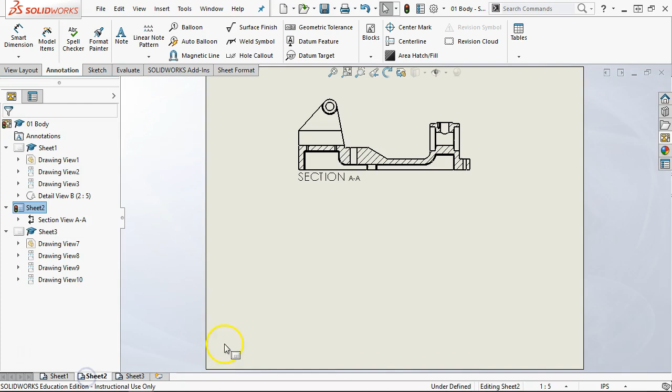All right, there was something on the section view. Oh, scale-wise, this is going to be pretty small on an A-size sheet. So scale, we can go back into the properties. And another quick note is if properties does not show up on yours, you will expand out, customize the menu.

I believe I've already done this, or I don't typically delete views on the right mouse button. If you do, go ahead and keep the delete on. But make sure that the properties are selected, are checked, and then it will show up. Otherwise, we got to go find it somewhere, and I usually just want to go Properties, and there is the sheet scale. So if I went half, not going to fit, but it'll look cool.

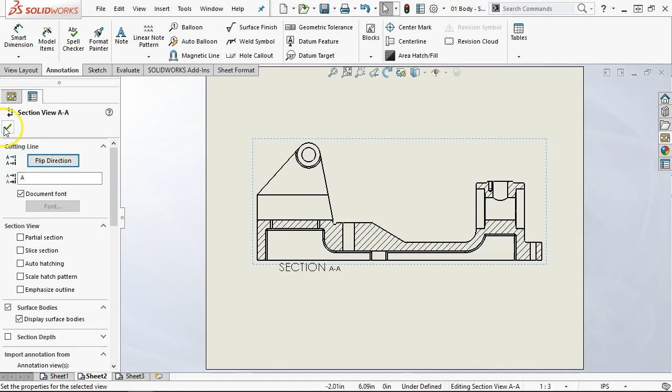So missed it by that much. So if I wanted something that was by a third, we are not locked into having to have specific scales. If I want to make 84/89 my scale, it'll figure it out. We do the math, if that's what it works out to, great. It's kind of an oddball scale, but hey.

All right, so we get the section view, we get it scaled to the drawing, and then now that we're in section view, we can start to pull out some of these other items. If I'm not on this end view, I should be able to go between those. And even though we're in that section view and it's through the cutting plane, it's still going to show up as a diameter because I'm dimensioning off the cylinder.

If I don't, I'm more concerned if I don't see that diameter than I do seeing that diameter. And then things like the depth, 0.75, to the spot face, 0.81. And we'll talk about the precision, the number of decimal places, all that kind of stuff later on.

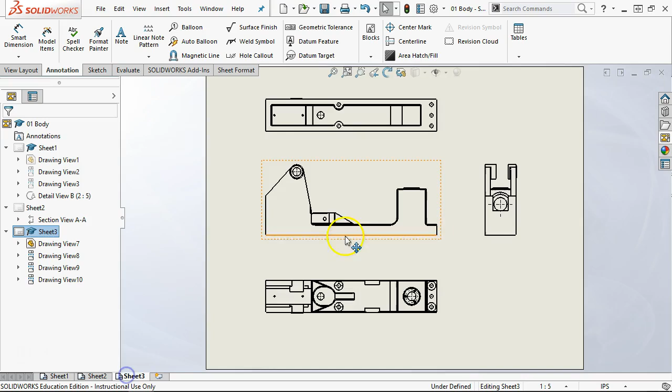And then I don't know if it'll show up. Let's try it, probably not going to pick it out. Nope, doesn't like that one. I was hoping to find one with the hole wizard, so yeah, that's a good example.

So hole call out, make sure that's selected. 3 times, so it does find the instance count from the hole wizard.

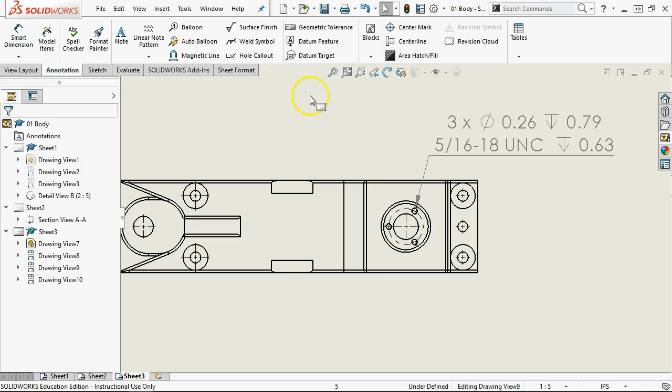Let's see, did this one section? So all of this is based on the ductile cast iron that we selected, and that is the section view or the hatch for the section view. Came in automatically from the material, not anything that I had to add.

But if there was an area of interest, hey, we're going to texture this, or this area gets, I'm going to put green Loctite on that for bearing retention or lubrication, or whatever. I can identify that area and say this whole area needs to be coated as part of my assembly process, and make notes as we go through with the area hatch/fill as a call out.

Revision symbols and revision clouds as we go through the design process and more people are involved and look at this drawing. The revision cloud says, hey, this isn't deep enough, or no, let's put 4 holes here, not 3, and we can see that cloud, and it's something that can either be printed or not printed with the drawing.

And then we go over to the tables. We can manually enter data into a table. The hole table would be all of the positions. The bill of materials for an assembly, everything that we've included in the assembly.

The revision table, what has changed, what has been updated. Weld tables, typically, is it a stitch weld, is it an 1/8 inch stitch weld, is it a continuous weld?

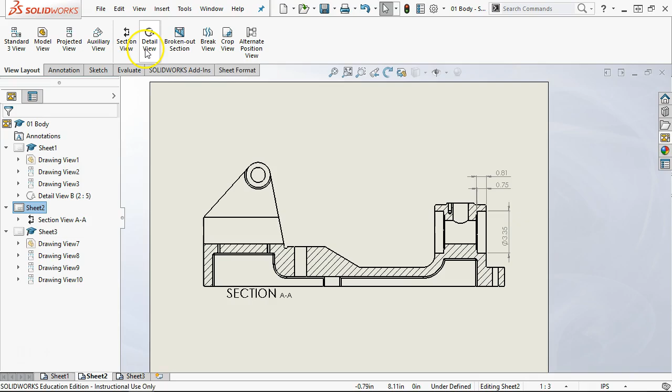Views that we didn't get into, we did a little bit with the projected view. Auxiliary view, I want to come off of this face and look at it normal to that face. We did the section view and detail view. Those are going to be the most common.

Broken out section, I want to remove back to, well, let's go back to this one. I want to remove this back to some depth and be able to locate it. And then the break view, well, this thing's really long and there's nothing going on here, so let's take out 5 inches of the middle section and shorten this up so that I can see more on the page.

And then crop view, I want to call attention to just this detail, and rather than creating a detail, I want to just chop it out. And then what's the other one? Or maybe I got that backwards. No, I think I got that backwards.

So check that, existing view, show only a portion. Yeah, it's going to take out just that view. So which one? Oh yeah, the broken out section is going to take it to a depth.

And then alternate position, we have all those cams and things that are moving. I want to show them at their limit dimensions. The alternate position view will either create the configuration for me or use an existing configuration that is at the max or min value, and it will put the dashed lines at the max and show it at the min in the drawing.

All right, so we have a lot of functionality that we're just barely going to scratch the surface of, but we're going to take it a little farther than we...